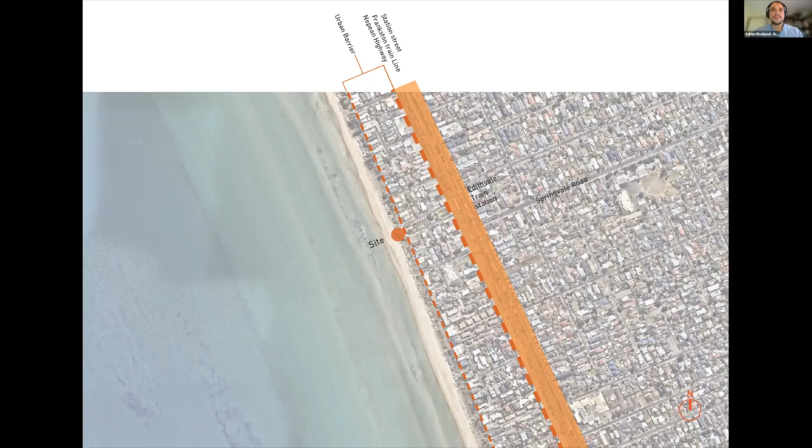A closer view of the site shows that the beach views are for those who can afford the luxury. The densification of the urban fabric is also responsible for limited parking, making pedestrians the prominent beachgoer. Accessing the beach through Beeson Reserve after getting off the train at Edithvale train station, over 25,000 people make the trip to this beach every summer, the majority of them on foot.

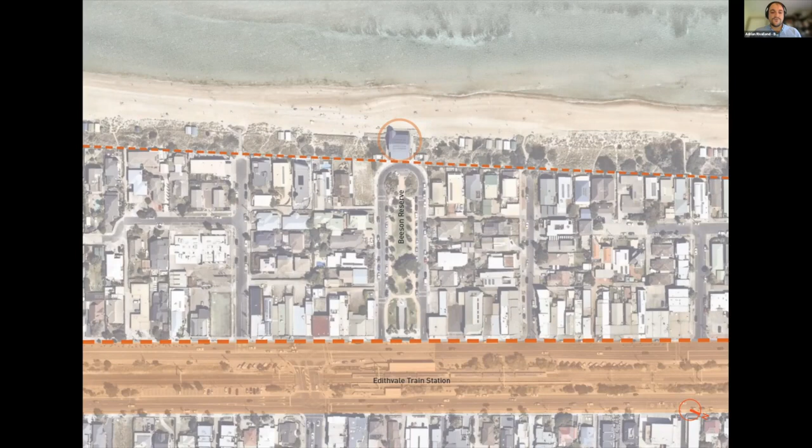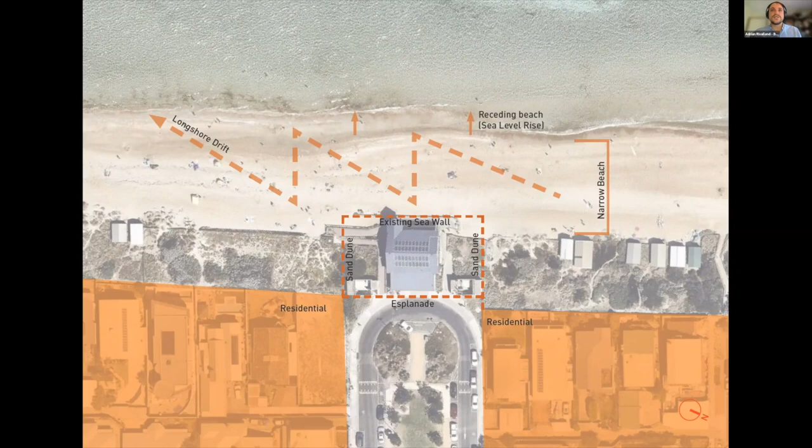The seawall, the sand dune, the esplanade, and the suburb define the four sides of the site. The environmental conditions and sand redistribution due to longshore drift and erosion mean that the site is forever changing. The existing building is a barrier. It has inappropriate tight access and is an obstacle for anyone trying to get down to the beach.

Edithvale is one of the most narrow beaches on the bay and will be significantly impacted by sea level rise. The building is lifted 800 mil to contend with predicted sea level rise in the year 2100. Already, the existing seawall has water lapping at its base at king tide events.

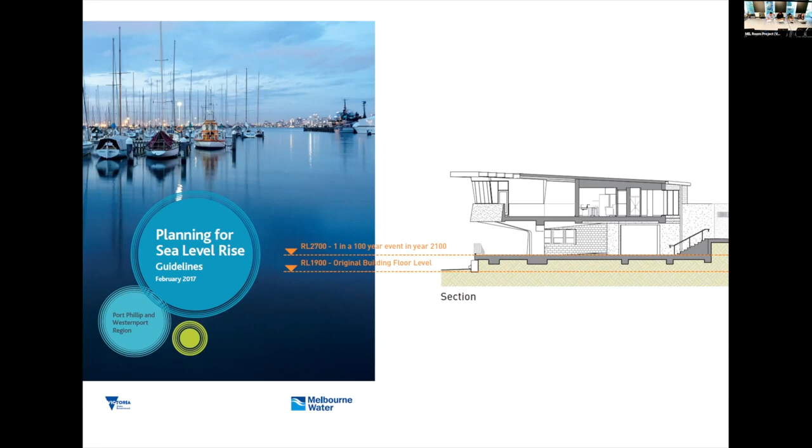Accessibility of the beach is a primary focus of the design. Two ramps from the concourse were provided to mediate the elevated ground floor and the current beach level, and they sit above the existing seawall. The ramps and concourse are an extension of the beach, coloured to mirror the sand and designed to allow the sand to creep up and entice people to make the walk down to the water. The beach is opened up to able-bodied persons as well as people requiring the use of mobility aids to get around.

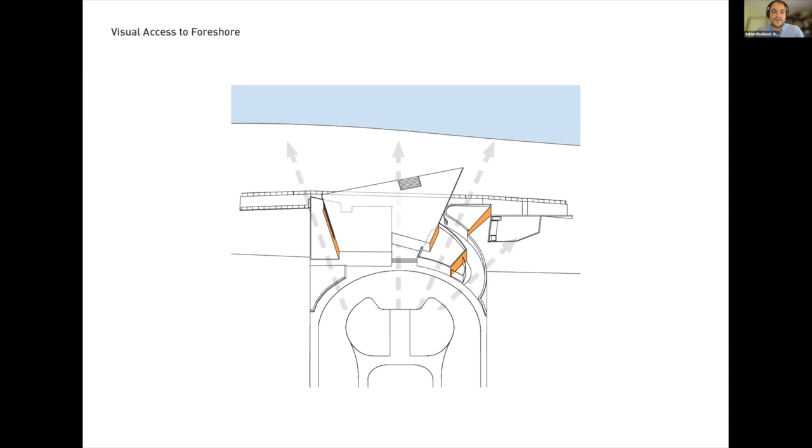Given the predominant visitor to the beach makes the trek from the train station, it was important for us to sculpt the building to provide views to their destination and provide intuitive wayfinding for all people regardless of diversity. The first floor is set back and bridges over the ground floor, creating beach views to the side and through the middle of the building.

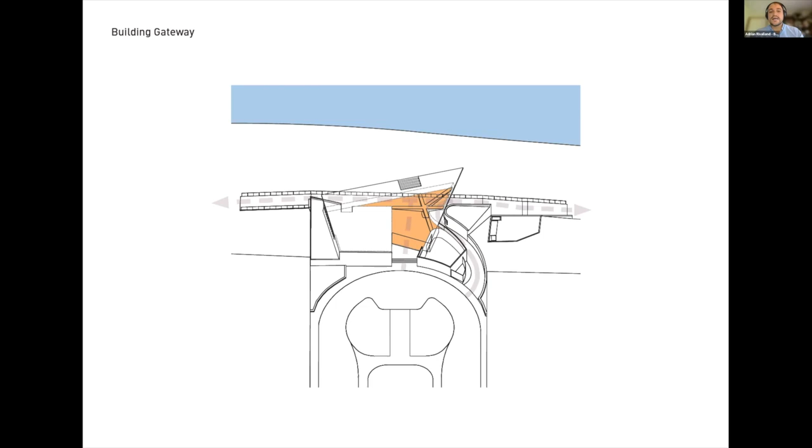The pedestrian access ramp on the north marks the beginning of the beach experience as it draws you down. Sand-coloured concrete indicates you've already arrived at the precinct, and the views to the beach let you pick out your spot in the sand before you get there. We understood that the building was not the destination, but rather it is a transient space to move from suburb to beach. It acts as a gateway to signify the change between urbanisation and open space.

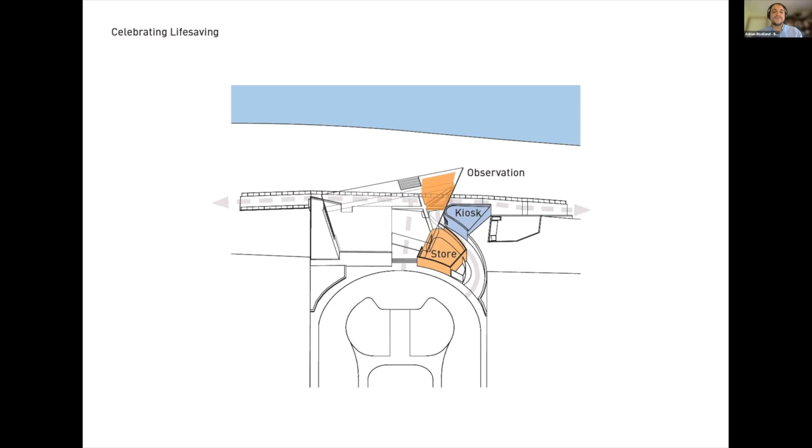It was important for us to celebrate the club and the lifeguards on duty. The observation room is cantilevered over the concourse from a central column, giving the lifeguards prominent position in the building. The elevated first floor covers the concourse and allows people to meander to the shore. It provides shelter and the ability to enjoy the beach without facing the harsh sun.

The kiosk is unique along the foreshore and provides a meeting place for all people. Located in the concourse, it lets you enjoy a coffee and a sandwich without getting your feet dirty. The column supporting the observation room with its tapering beams is a rock in a stream of water. The only column on the concourse, people move around it and interact with it without realizing.

The observation room sits over the top of this column, cantilevering over the concourse, letting people know that there are lifeguards on duty, keeping them safe while they're spending the day on the beach.

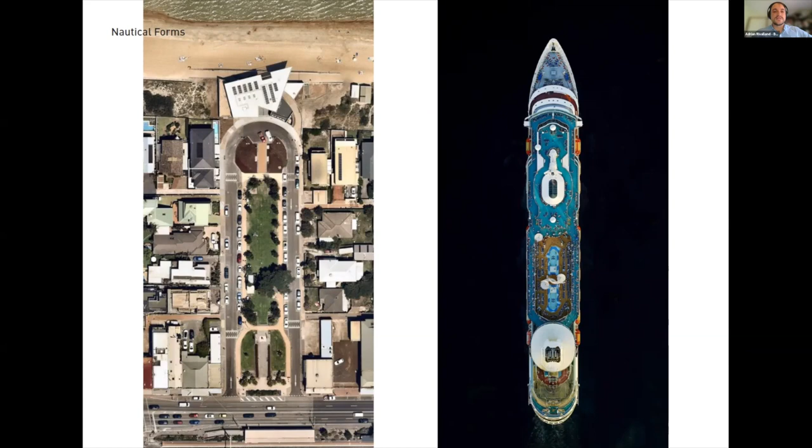We drew inspiration between the esplanade and long seafaring vessels such as cruise ships, starting at the stern and building at the bow. We used the geometry of these vessels to assist with generating the forms of the building. The bow cantilevers over the pedestrian space and provides the elevated platform required to observe.

The lineal balustrade is slightly splayed to reflect the forward tilt of the observation room glazing, the linearity of the balustrade reflecting the hull of the ship.

As we lifted the building, we needed to consider solar access to the concourse. The public interact with shadows, trying to stay as covered as possible when ordering from the kiosk. The kiosk owner is constantly reshuffling the outdoor furniture to have as much protection for his customers enjoying their meals as possible. If you're there long enough, you'll see the outdoor tables and chairs move further and further back into the concourse, almost hitting the staircase at the end.

The afternoon sun, facing west, fully penetrates the full depth of the concourse, creating playful shadows for people to walk around.

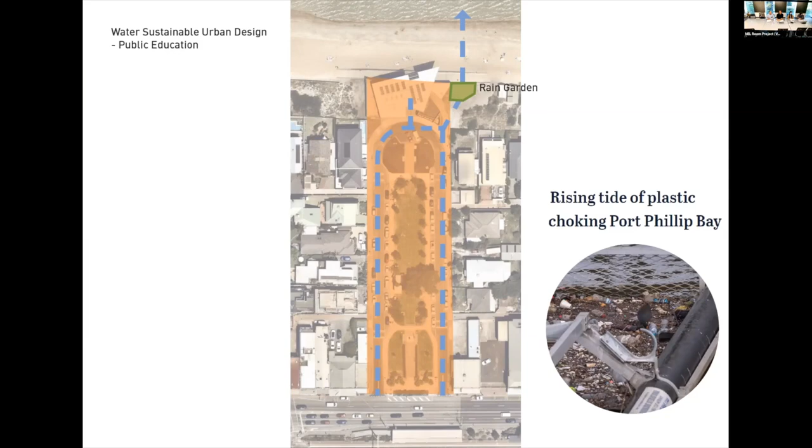We're extremely proud of the water sustainable urban design for this project. The entire precinct, the reserve, the esplanade and the building all have their stormwater captured and filtered through a rain garden before it is then discharged out into the bay. It is also used as a tool to educate the public.

Located adjacent to the beach ramp, filtered objects and debris and plastic are visible for all as they make the walk down to the beach. This image taken last weekend shows the rain garden has fully flourished and the way that people can interact with it, noticing any items that don't belong.

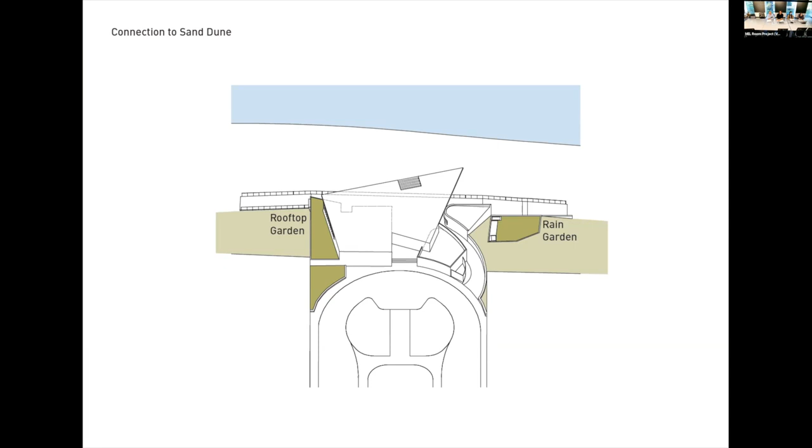The building is positioned to be partially submerged in the sand. This was required to mediate the levels between the elevated esplanade and the beach. The sand dune is brought over the top of the change rooms on the south to reinforce the connection to the sand dune. 1 minute remaining.

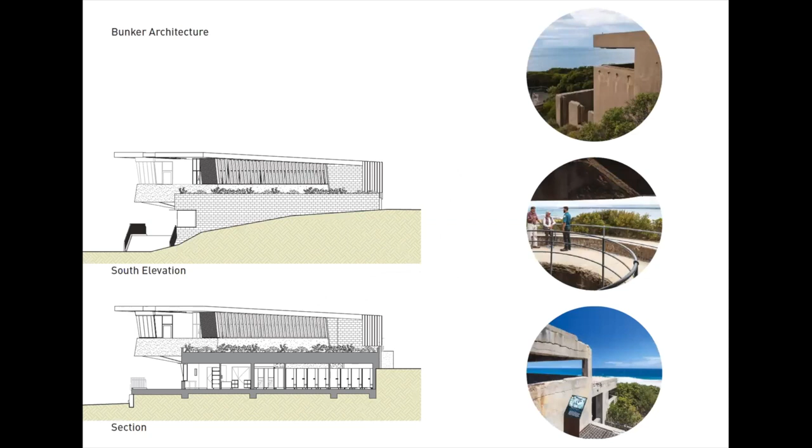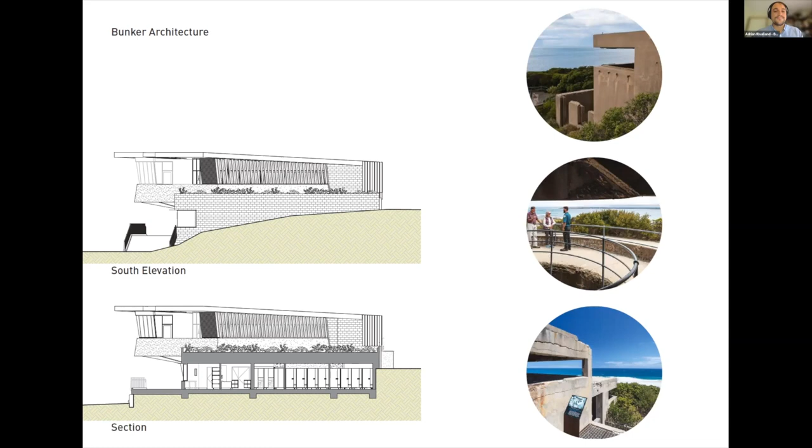We look to Fort Nepean to assist with integrating the buildings into the landscape. Partially submerged bunkers also have the same basic function of observing the water. The patrol room on the south of the building is a slotted window through a masonry element. The kiosk is treated in the same way, both flanking the building north and south at the top of the pedestrian ramps.

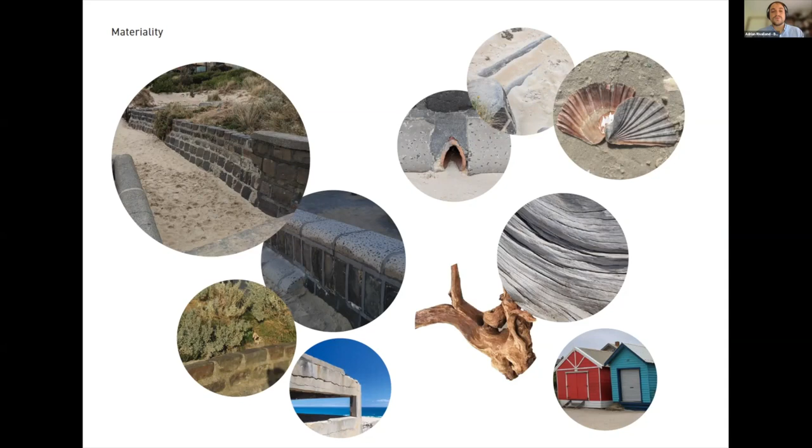Materiality is used to anchor the building to site, along with concrete and bluestone. Timber is used to help the building age in place. The intention is that each passing season, the building will have subtly changed as a reflection of the environment to which it's exposed. These images taken in March show the timber is graying, the concrete is showing signs of weathering, the dune is taking over, and the sand is creeping up the paths.

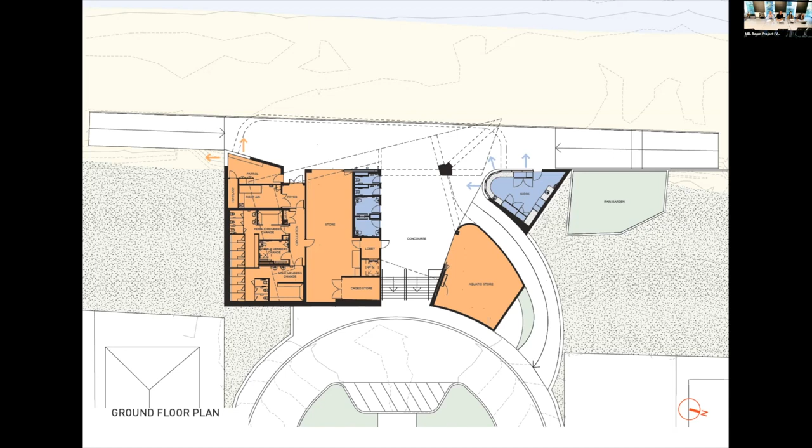The blue indicates the public space, the toilets and the kiosk. The orange shows the club space, the change rooms and the toilets. The concourse runs through the center of the building. The column supporting the observation room sits in the middle, unapologetically making people move around it.